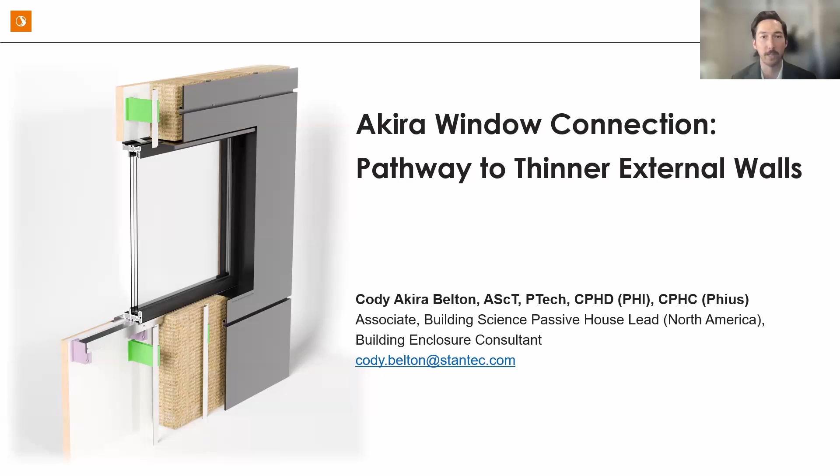I guess the one thing I would add, just for those who have never heard of Akira Window Connection, I am the inventor of this window install method. I didn't do it alone though. Back in 2023, I applied for a grant from the British Columbia government for BC Housing. They used to do these grants that would basically fund up to $30,000 for anything in the realm of building innovation or education. And I had this idea to create essentially a thermal bridge-free window install or door install. Once we received that funding, that really helped kickstart our Stantec team to vet this idea through structural analysis and 3D thermal analysis to give the most accurate linear transmittance results, and analyze it from a condensation risk potential lens to see if it really is what we want it to be. So we'll dive right in.

So what we're going to be going over is what Akira Window Connection is. We're going to review some past water penetration results. I'm going to review a case study; we do similar case studies with a lot of ongoing projects just to try to determine what detailing we want to use on particular projects. And we're going to talk about other projects that have integrated Akira Window Connection. So this ranges from passive house projects that are pursuing the top levels of energy performance, with BC's, so I'm based in British Columbia, Canada, the BC Energy Step Code. There are some buildings that are trying to hit the top levels of that, so we've used Akira Window Connection on those.

And there are also projects that have integrated it in prefabricated wall panels. So there's a huge range of applications for this. And that particular project is the VIU student housing project, so that's Vancouver Island University. We're going to review some mock-up testing and lessons learned, and I have some updated photographs of how that project is progressing.

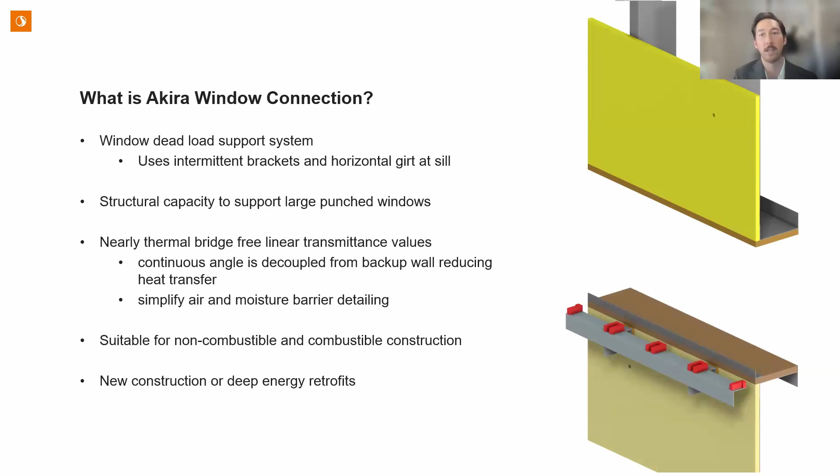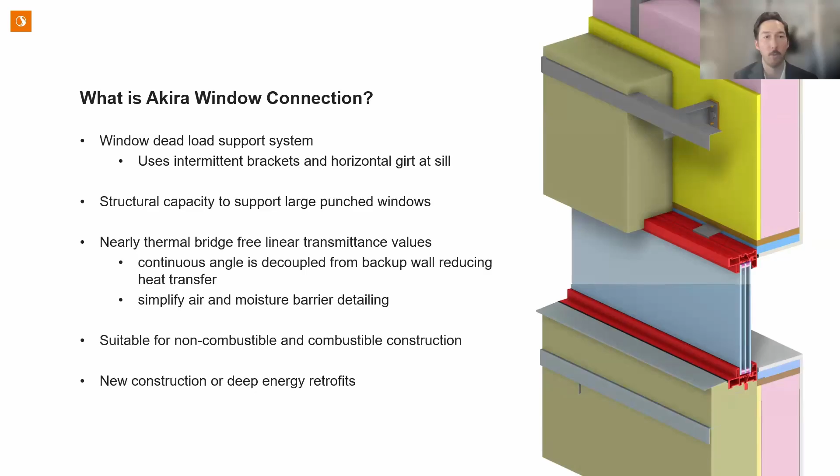So what is Akira Window Connection? Akira Window Connection is a dead load support system with intermittent brackets fastened to the backup wall structure and a horizontal girt supported by those brackets. So the system has sufficient structural capacity to support large windows, enabling architects to exercise design freedom. And the continuous angle is decoupled from the backup wall to reduce heat transfer and simplify air and moisture barrier detailing. So this connection method can provide nearly thermal bridge-free linear transmittance values, or psi values, at the window-to-wall transitions to help improve whole building thermal energy performance at both new developments or deep energy retrofits.

So to review some of the sequencing, there are a lot of different backup wall options that the Akira Window Connection could be applied to. Essentially, it would be a good strategy for any wall that uses exterior or external wall insulation as a primary thermal barrier. So this is just an example of a steel stud backup wall.

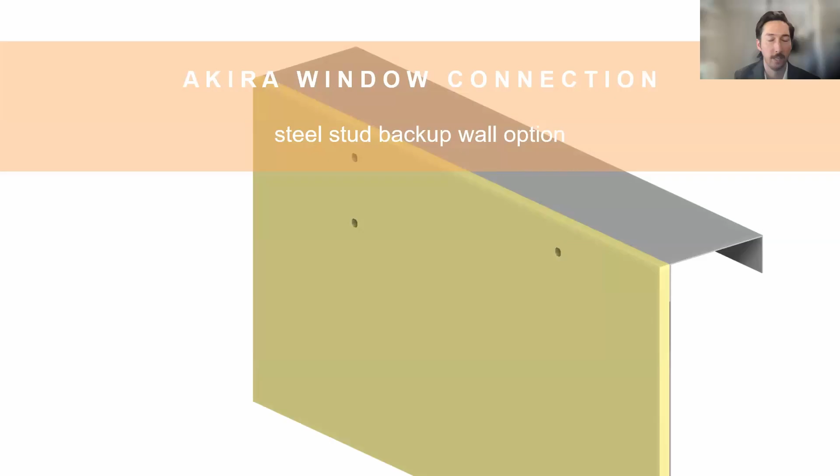So here we have 16 gauge steel studs spaced at 16 inches on center at the windowsill. You'll have your conventional exterior wall sheathing, so it could be DensGlass or something like that. There's an option to line the rough opening with plywood. This is common practice where I come from. It helps with applying different membranes to the sill and whatnot to give you a smoother workable surface rather than dealing with the steel studs.

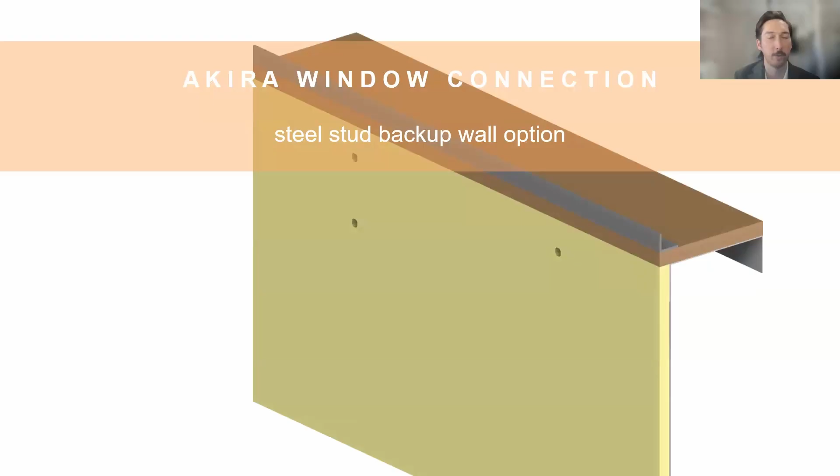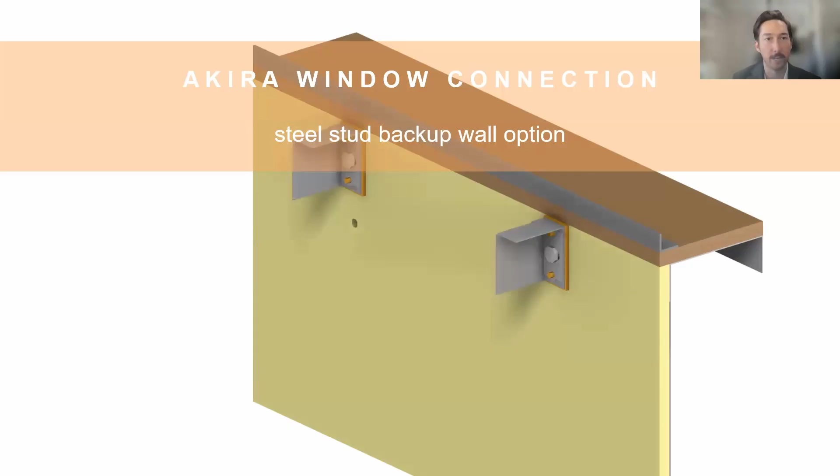And as part of the wind load support system, it's very typical for us to use continuous metal angles at the sill that are fastened into the window frame to help pick up that wind load. And mind you, these are screenshots taken from our 3D thermal modeling software, so this particular sequence doesn't include the wall membranes, but I'll get to that in a later slide. Before you put on these brackets, you're going to wrap your walls with your wall membranes and pre-strip your windows.

But what's going to pick up the weight, the vertical loads or dead loads of your window system, is no longer going to be supported in its typical position on the sill. We are going to use, or repurpose, cladding attachment brackets. In this case, these are approximately 3 inches in depth here. And we're going to line the top edge with a 2-inch by 2-inch, in the case that we analyzed, 18 gauge galvanized steel angle.

So this creates a gap between the exterior wall sheathing and this horizontal angle. That allows your exterior insulation to butt directly into your fenestration with minimal interruption to reduce that thermal bridging. So this horizontal angle becomes the new bearing point. Window manufacturers like to use intermittent shims to help level their window systems, so we're going to do the same here.

So in this particular model, we're showing the Universal Series fiberglass frame window by Cascadia Windows. In a past research study, we repurposed some old thermal modeling detailing, and we already had this window in place. So that's what we chose to use for this study.

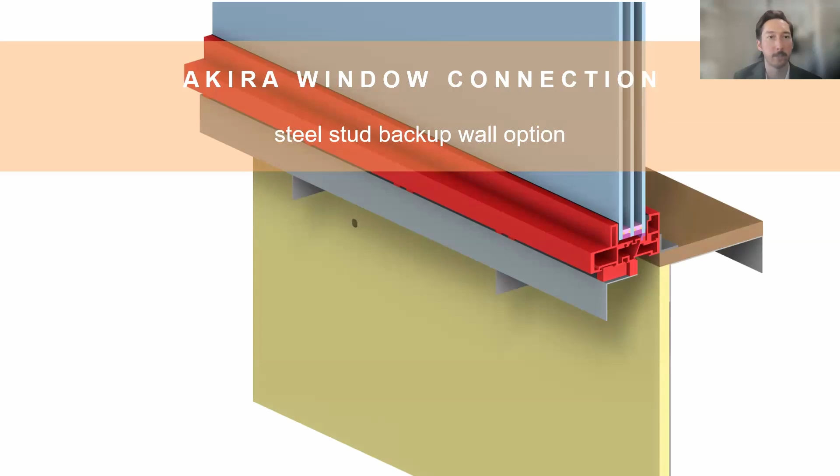And then you're going to have your field of the wall installation for how your cladding is being attached. In this case, they're using larger intermittent brackets with horizontal girts. And you're going to want to fill that space between the intermittent shims with some sort of insulation. I believe good building science practice calls for something that allows for some free draining, so I like to use loose fill mineral wool to fill in those voids. And then you install your exterior insulation layers that are going to butt into your window frame.

And in this particular case, we slightly over-insulated the frame edge. That's absolutely not a mandatory thing with the Akira Window Connection, but the point of this particular detail is we wanted to try to drive down this linear transmittance, or thermal bridge, as low as possible. So we wanted to do everything in our power to make this thermal bridge free.

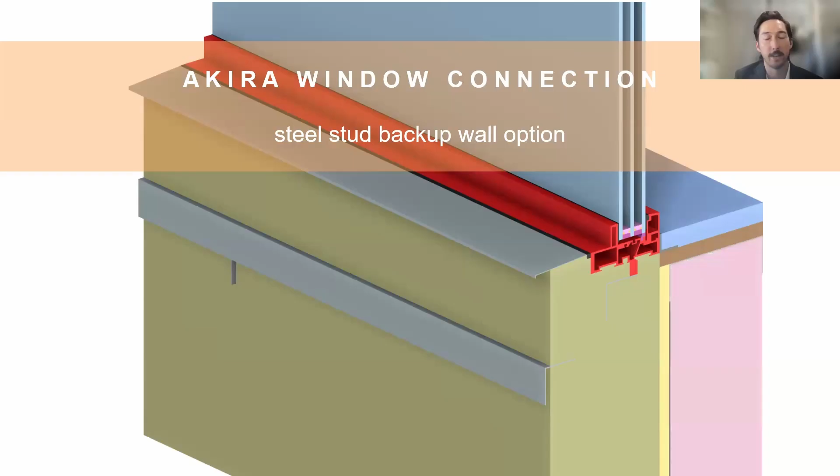And what we found with some trial and error is that if you line the interior rough opening with 1-inch rigid insulation, in this case XPS, we found some reductions in our thermal bridging as well. And then in our steel stud cavities, we have batt insulation, and you apply your interior finishes, and that's it. That is the Akira Window Connection in a nutshell. This is another view of it from the underside, just so you can get an idea of how we're trying to expose the bottom edge of that window frame so we can get our exterior insulation to butt into it.

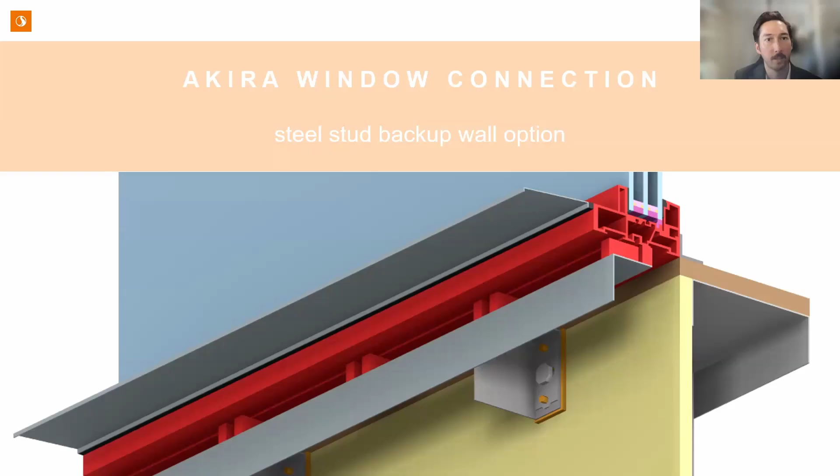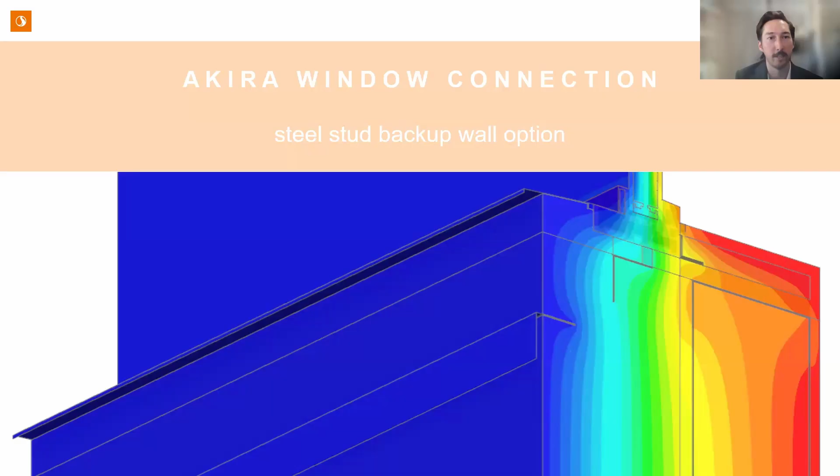So now to look at the water resistant barriers, or the WRB, and the air barrier detailing. This more or less aligns with conventional best practice that's been used for decades from my experience. So you install the WRB sheathing membrane pre-stripping on the exterior wall, and you wrap into the window's rough opening over the plywood liner at the sill, at the head and jambs, and recommend using self-adhered membrane for this application that can self-seal at fastener penetrations, and to use prefabricated corner pieces, membrane gussets, and sealant as necessary to be

air and water tight. So at the sill, if a continuous sill angle is installed as part of the window's wind load support system, as previously mentioned, that's on top of that plywood liner, then the WRB should wrap up and over that sill angle to form a waterproof back dam. So if you refer to location A on the left here, I'm going to try to zoom in.

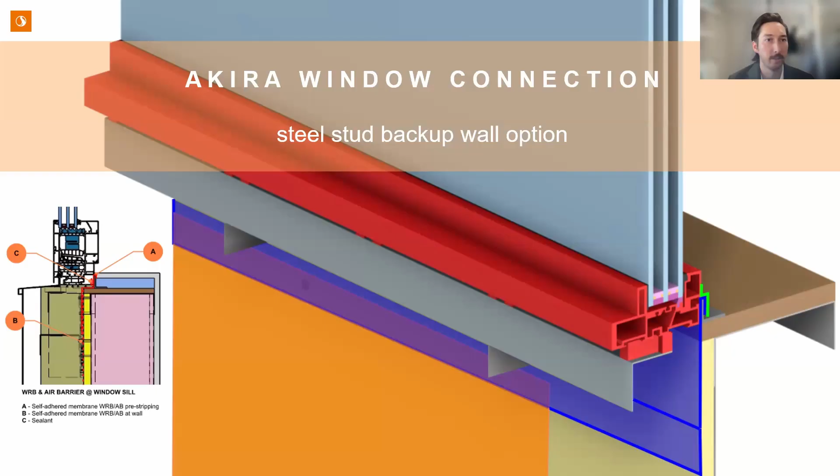So in this detail, we provided an air and water seal installed between the interior edge of the window frame and the sub-sill flashing membrane. So this could be with an air barrier tape or sealant.

So the other beauty of this particular install that I like from a building science perspective is that window systems, if we aren't proactively renewing them after the end of their service life, they will eventually leak. This typically might happen at the mitered corners where different windows are manufactured in different ways, but a lot of the times they will rely on some sort of internal sealants. And at these mitered corners where they're relying on sealants, those eventually will fail and you'll get water percolating through your window frame. So I like the idea of positioning the window completely outboard of our WRB, where the water can basically freely drain through our exterior insulation layers, if it is something that's more or less breathable, like semi-rigid mineral wool.

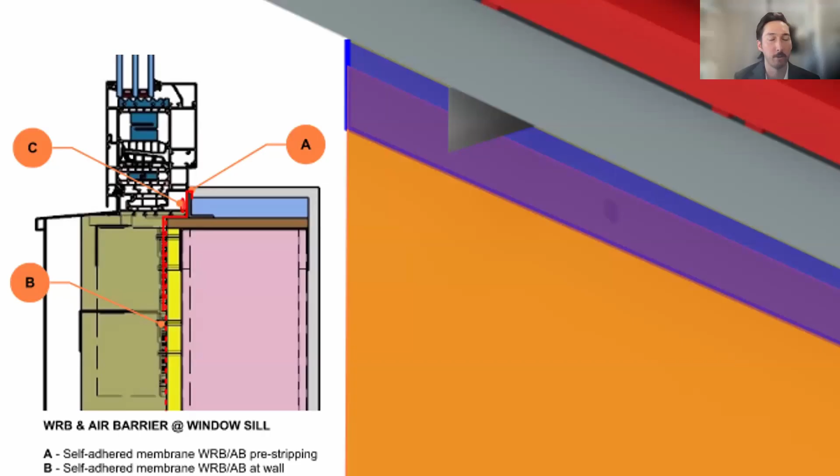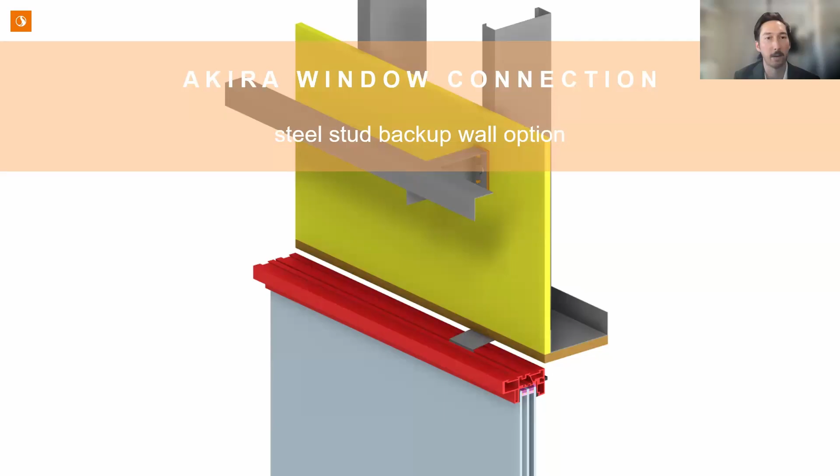So to get into the window head install sequencing, we again have the steel stud backup wall, our exterior wall sheathing, we're lining it with plywood, and our clear field wall assembly, whatever that may be. And the only difference here is that at the head, we don't need to worry about the vertical loads of the fenestration. So all you're seeing here is the intermittent strap anchors that the window manufacturer will use. And this window positioning will work for pretty much all window manufacturers, where the strap anchor should still be able to reach the backup wall to fasten into that.

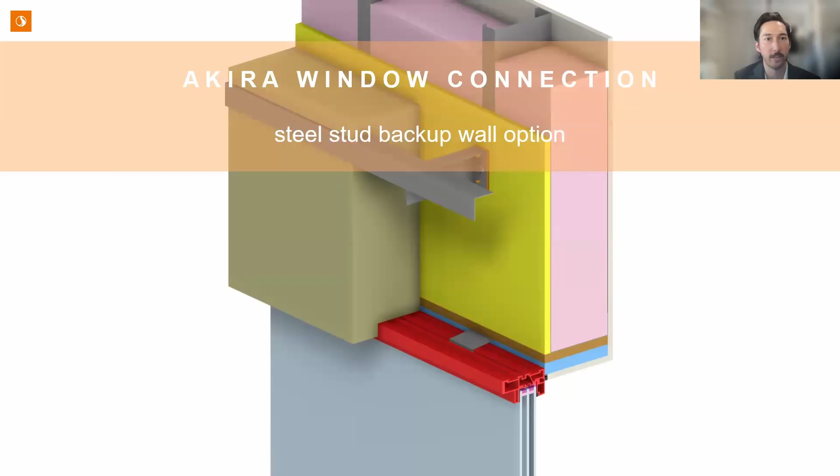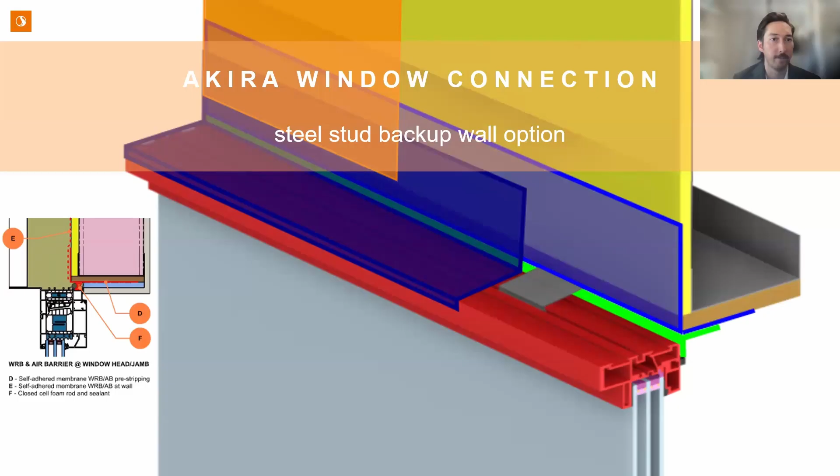So at the head and jambs, if additional moisture durability is desired, you can install a self-adhered membrane or a high-performance tape on the sheathing membrane pre-stripping at the wall face and seal to the window frame. And if you look at location F on the left here, this provides an air and water seal installed between the WRB sheathing membrane pre-stripping and the window frame from the interior side. So again, this could be an air barrier tape or rod and caulk seal.

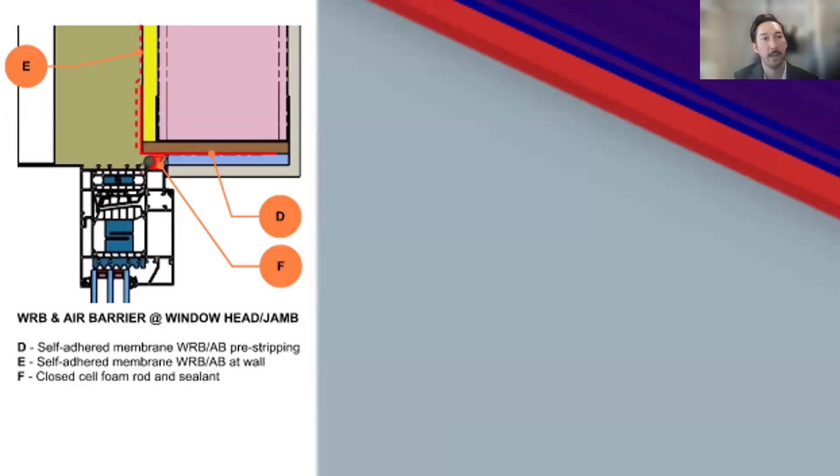And in a later slide, we'll get into some laboratory testing done at Cascadia Windows, where basically we would test this at absolute worst case scenario that wouldn't really happen in a real situation, but to really test the durability of these types of rod and caulk seals at the perimeter, we tested the window with having the entire WRB exposed. So there was no exterior insulation, there was no cladding. We just had the WRB installed on the wall, the window installed, sealed with rod and caulk, and tested it mimicking a high wind-driven rain event and had successful results with no leakage.

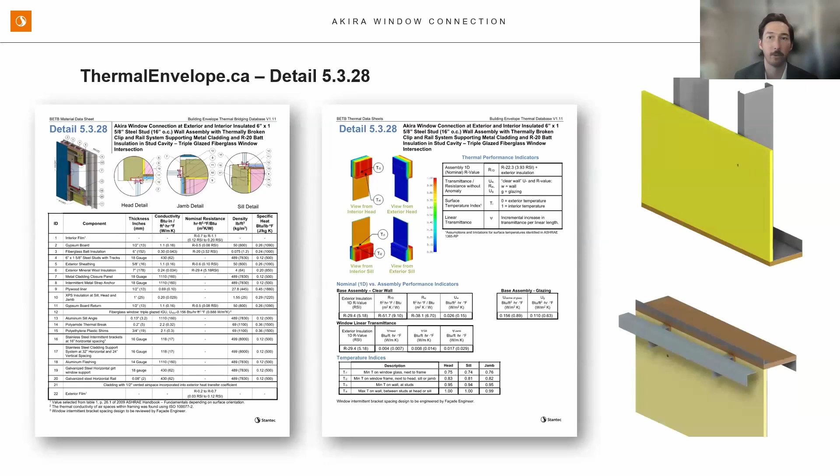So here are some sample data results sheets available at thermalenvelope.ca for Akira Window Connection for the steel stud backup wall option. If you've never heard of thermalenvelope.ca, I highly recommend you go check it out after this presentation. It is, I believe, North America's greatest resource for learning about the U-values of opaque wall assemblies and roof assemblies, all floor assemblies, and the psi values modeled in 3D at various junction details. So it's, I believe, over 700 plus details and growing. And these were added a ways back. And as more manufacturers adopt Akira Window Connection, we will be adding more and more options, analyzing different products and their respective psi values or linear transmittance values.

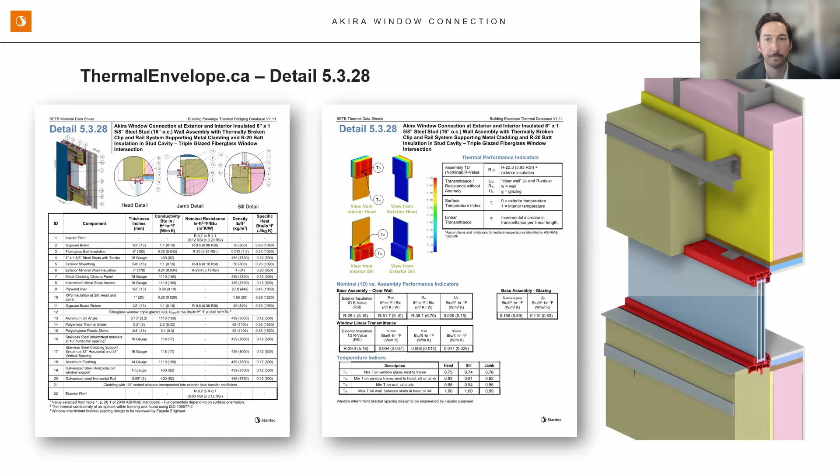So the use of intermittent brackets triggers the need to use 3D thermal simulations to get accurate psi value results and accurate interior surface temperatures. Attempting to use 2D thermal modeling methods such as Therm or Flixo, although they all have their place for certain situations, as soon as you're dealing with more lateral heat flows created by highly conductive components like metal thermal brackets, and especially steel studs, the 2D models can't accurately capture the heat loss happening laterally, because we can only slice through one plane of that particular junction.

So this is where relying on 3D thermal simulations is a big help to get more accurate information into your thermal model. Potentially, if you're relying on 2D results, your results could be skewed plus or minus 60%, we found in the past. So if it's a high impact thermal bridge, it's really important to get very accurate results.

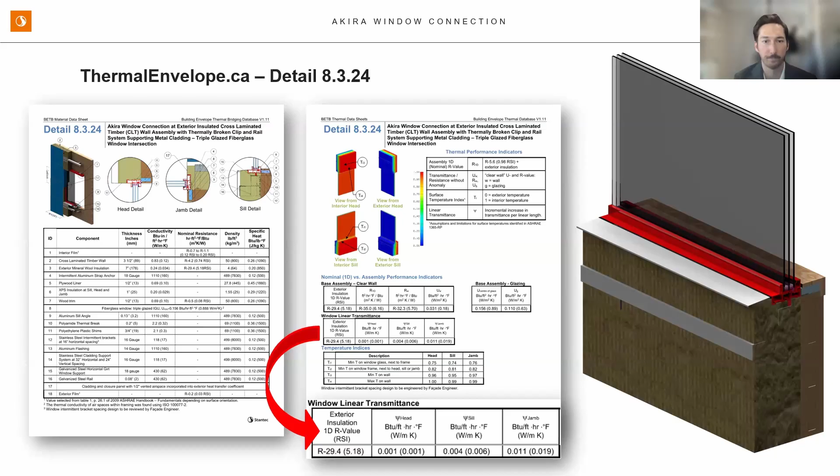So this just goes to show that Akira Window Connection is increasing the design freedom for architects that may want to have larger windows. The risk of using a window install method that hasn't been vetted by structural analysis is that the architect may want large windows on a particular project, but your energy modeling assumed a system, and there are many different methods out there. The ones that come to mind right now are the type of systems that use rigid foam in some cases fastened to your backup wall to help support the windows.

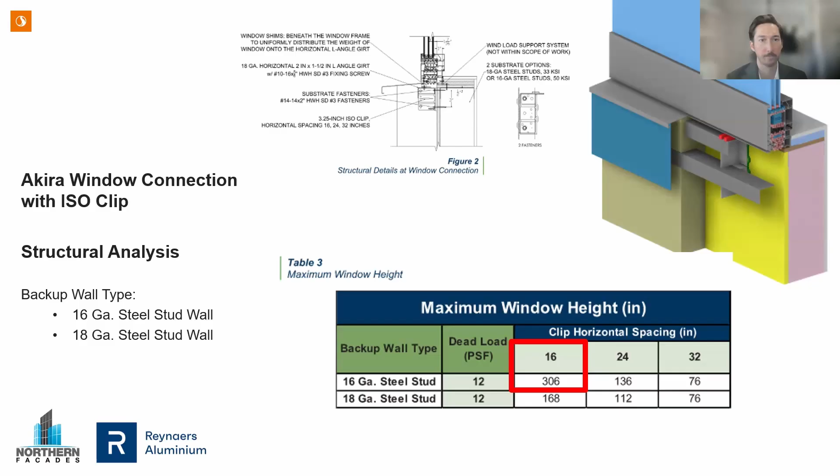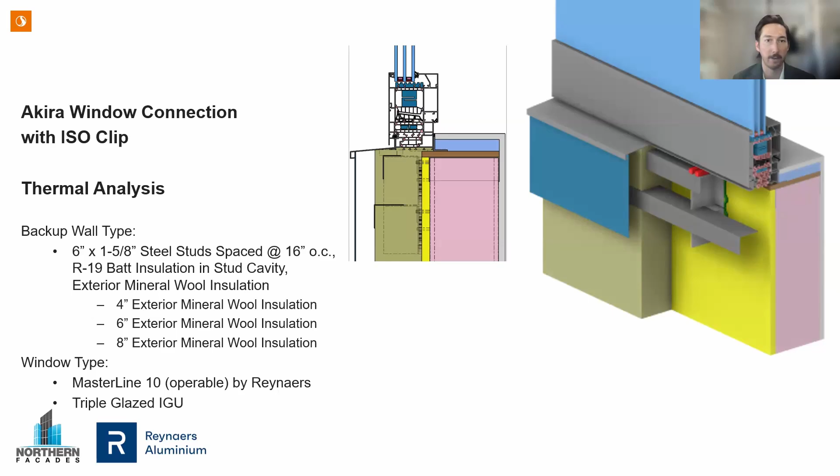So the building performance analysis team at Stantec conducted a thermal analysis of Akira Window Connection with a 3¼ inch IsoClip as the window dead load support system. The thermal analysis was for a steel stud backup wall that included R19 batt insulation in the steel stud cavities, and they tested various exterior mineral wool insulation thicknesses listed here at 4 inches, 6 inches, and 8 inches.

I know these results here are very small, but you will receive a copy of this presentation so you can check them out later, or request them from Northern Facades or Reynaers, which were the components analyzed in this system. They provide the results for all the different insulation levels for the different transitions at the head, sill, and jamb.

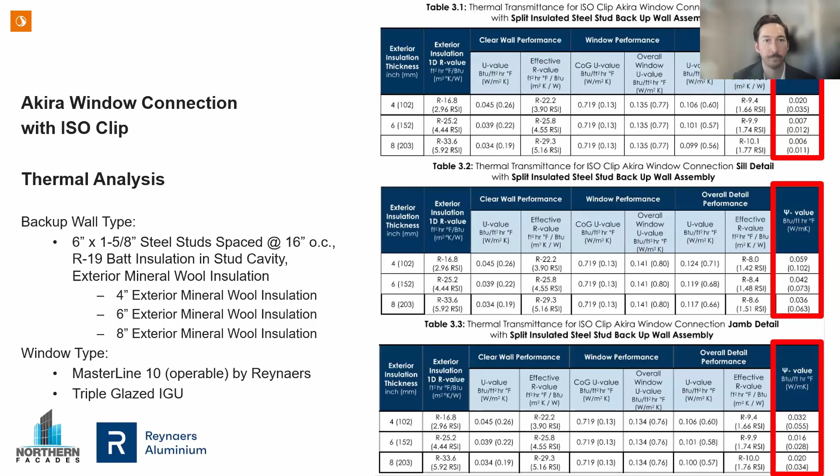So the facade team also conducted a detailed thermal analysis for another thermal bracket, ISO Clips, as the window dead load support system in this case. Here I got some sequencing using this particular product. With every cladding bracket, thermal bracket you may want to use for your particular project, they all have different pros and cons and features.

One unique thing about this particular product is that I visited their manufacturing plant in Langley, and these brackets can actually be cut to customize sizes, so the actual height of these things can be adjusted to potentially support even larger windows. So that was a unique factor of this.

And to suit the manufacturer's wants for this particular install, instead of having the interior face of the window frame exactly aligned with the exterior face of the exterior wall sheathing, they wanted it to be slightly inset so they can still utilize their strap anchors that are typically installed at the head and jambs for wind load resistance.

So it's the exact same concept. We're lining it with our horizontal girt, got their window there. And yeah, you've seen all that before.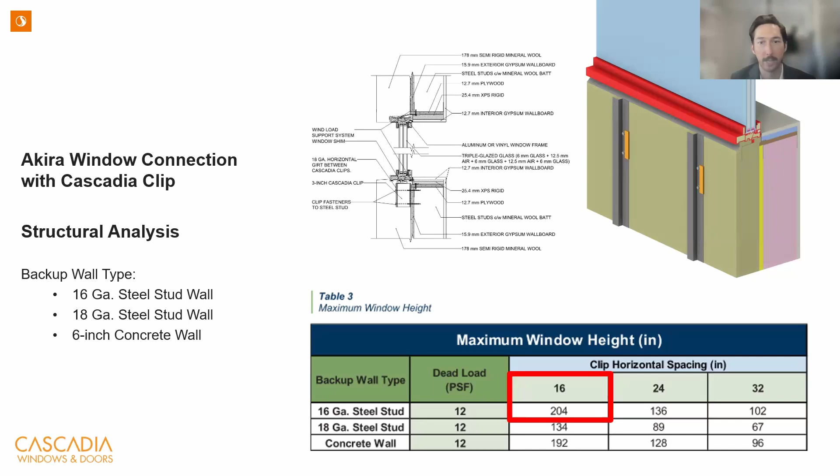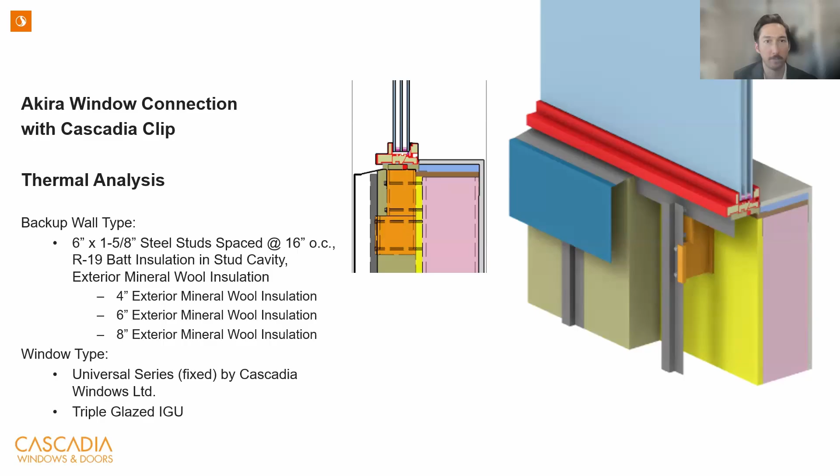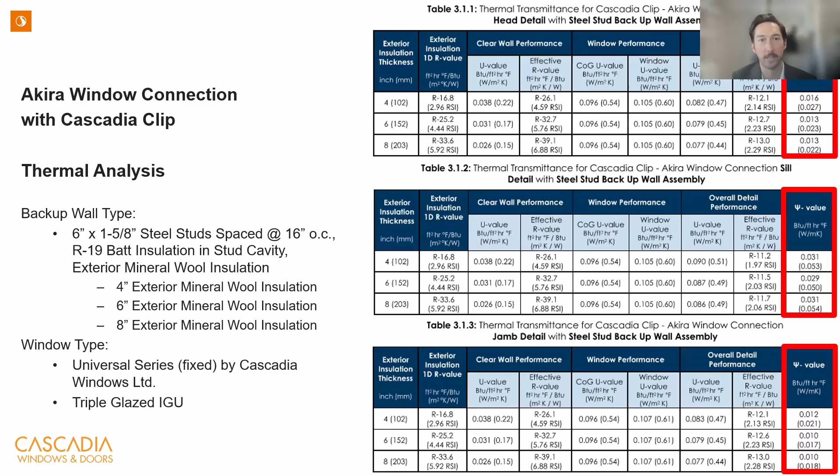So the building performance analysis team at Stantec also conducted a thermal and condensation analysis of Akira Window Connection with the 3-inch Cascadia clips as the window dead load support system. For this analysis, it was again for the steel stud backup wall that included R19 batt insulation and the same insulation varieties previously presented with the ISO clip option. So this is for the 4-inch, 6-inch, and 8-inch exterior insulation options. And again, here's some very small results for you to review at a later date, I hope. But this gives you some accurate data inputs you could be using in your energy models for window installs at the head, jamb, and sill.

So the condensation risk analysis focused on the window to wall connection detail and evaluates surface temperature at the glazing, window frame, and window support components. This analysis is based on conservative estimates for steady state conditions to determine if condensation would accumulate when interior air contacts components within the connection detail. The Akira Window Connection thermal simulation calculated no risk of condensation at all component surfaces inboard of the exterior gypsum wallboard that are warmer than the interior air dew point temperature, with the interior air temperature at 68 degrees Fahrenheit with 60% relative humidity.

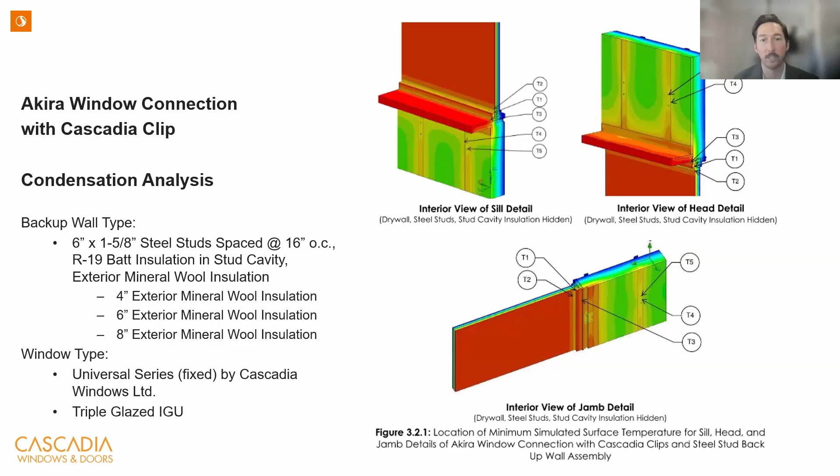Now, Cascadia constructed a laboratory mock-up with a Universal Series fixed window supported by Akira Window Connection with their 3-inch Cascadia clips. The air and water seal at the sill was achieved with sealant, so there's a sealant bead at the interior edge of the window frame and the sub-sill flashing membrane on the sill angle. At the head and jambs, rod and caulk was installed in between the WRB sheathing membrane and pre-striping at the window frame from the interior side to maintain air barrier continuity and provide watertight joints.

So this is nothing new. This is very conventional practice that I've been basically seeing and doing on the majority of our projects going back to 2006. So I'm sure it goes much further back than that. And this is a very tried, tested, and true method of creating good air tightness, continuity, and water tightness between your wall and your window system.

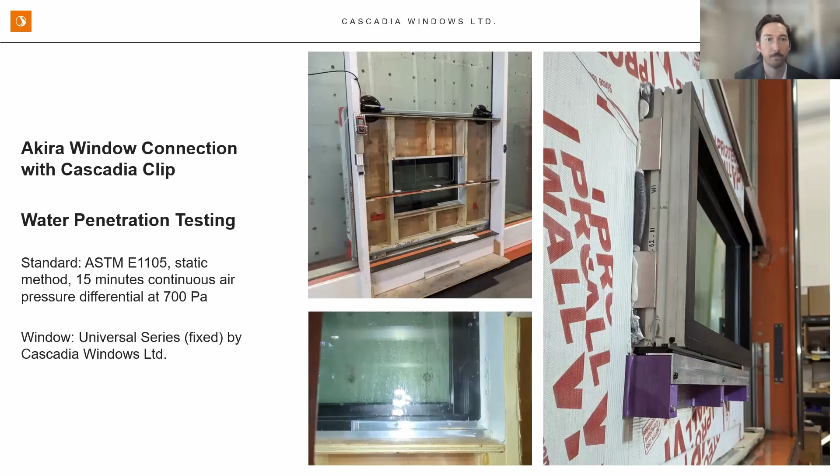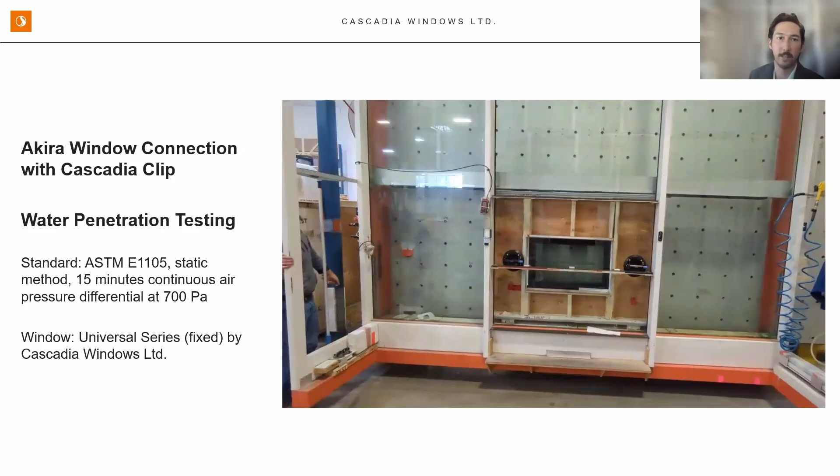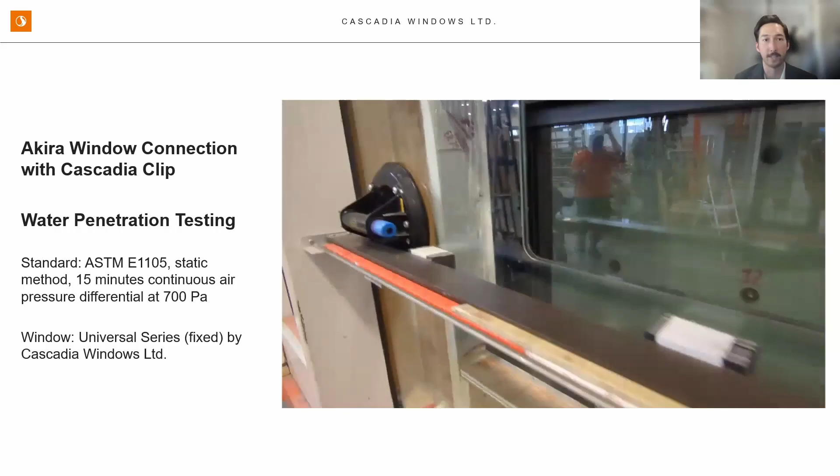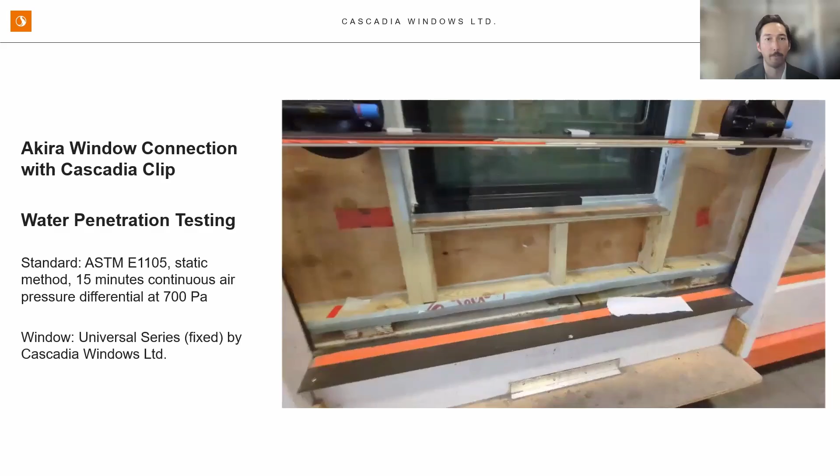So here's a little video of the testing chamber installed at the Cascadia Windows factory in Langley, British Columbia. They do a lot of this testing when they're manufacturing their windows, and they want to make sure that they have a high level of quality control. I'm not sure at what frequency they do this, but this was a handy little chamber to conduct this test for this unique, innovative window install.

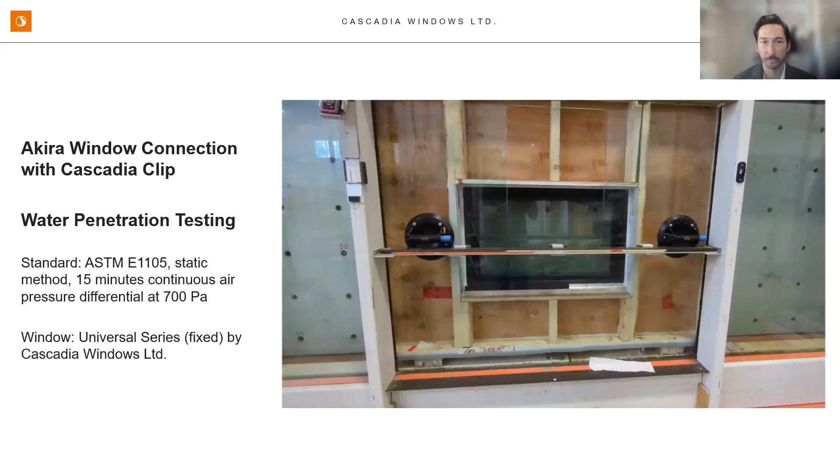So now we have Akira Window Connection dead load structural results. We have linear transmittance results for various backup wall types. And now we really need to put this to the test on a real project. So we started by conducting a thermal performance study for the Twin Towers retrofit project using Akira Window Connection at all punch windows to showcase its beneficial impact to the external wall design.

So a little background information on this project. The Twin Towers are two concrete, mixed-use, high-rise towers located in North Vancouver, British Columbia. They were constructed in 1977. Tower A is 16 stories, Tower B is 13 stories, and the retrofit is targeting Step 3 in the BC Energy Step Code, which has a space heating demand target of 25 kilowatt hours per meter squared per year.

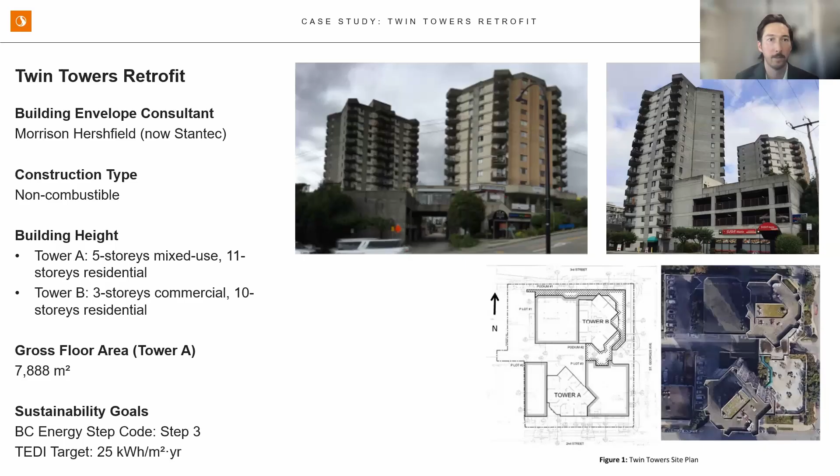So to achieve Step 3, based on the project's dynamic energy model, we need an opaque wall system that meets or exceeds effective R 9.1. So how do we get there? What wall assembly and window install design will achieve this thermal resistance target?

So we analyzed 3 different window install design options, and all 3 are available to view at thermalenvelope.ca. We have the conventional option on the left, the improved option in the middle, and Akira Window Connection shown on the right.

So the objective was to determine the clear field wall design based on the 3 window installs shown here, and how a better window install design can provide a trade-off opportunity with the external walls to reduce the exterior insulation thickness. So all 3 options will produce equivalent energy performance and provide an impact to the wall construction material costs.

So first we analyzed a poor window install, the conventional option, where the window's sitting directly in the rough opening on the steel studs. So this option leads us to add excessive insulation to the external walls to compensate for the heat loss borne from this window to wall transition. This can be explored in the energy model, but typically reveals diminishing returns to the overall thermal performance.

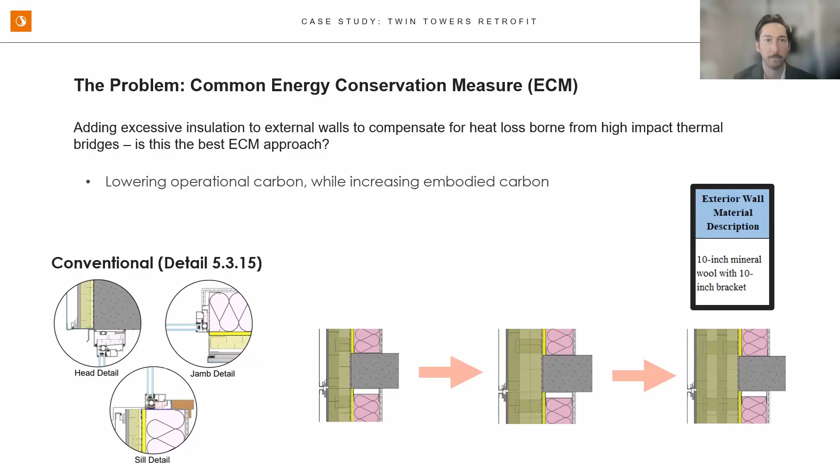So a more effective energy conservation approach is to reduce heat loss at high impact thermal bridges that can be optimized. So by changing the window install to Akira Window Connection, we can reduce the exterior walls insulation to 6 inches thick in lieu of 10 inches and still achieve effective R 9.1 at external walls.

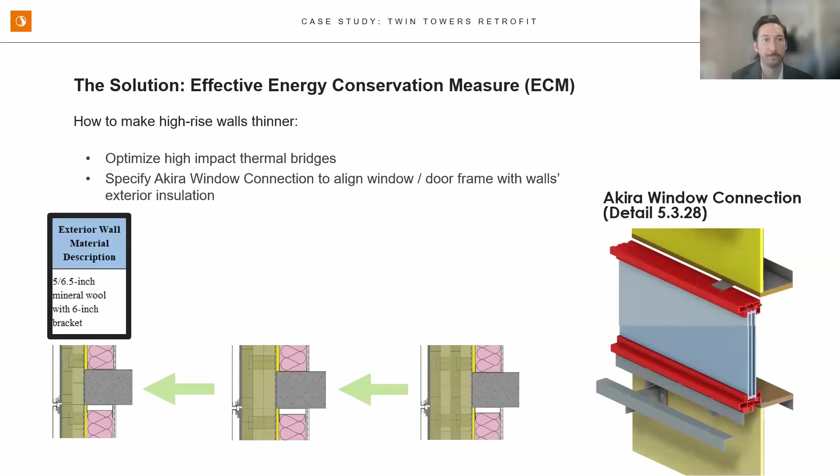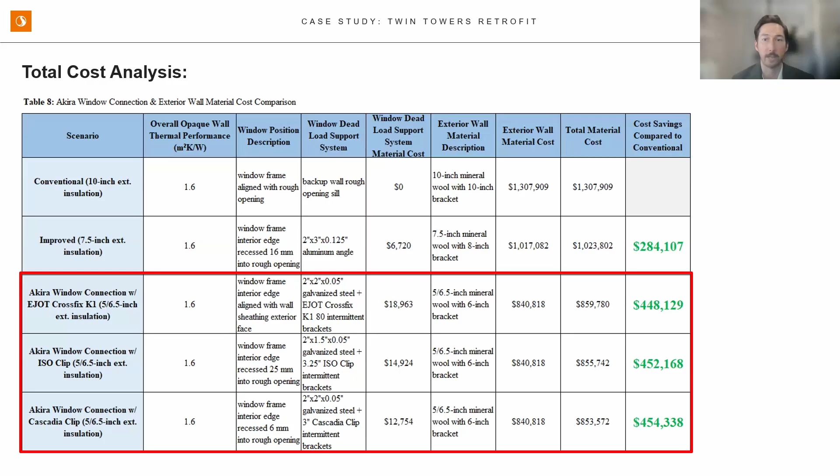So table 8 shows the material cost comparison for Akira Window Connection plus exterior wall impacts for the Twin Towers retrofit. So in essence, with this reduction in insulation from the exterior insulation and the reduction in cladding attachment brackets, we would anticipate to save up to $454,000 Canadian, or about $331,000 US in material costs compared to a scenario with a conventional window installation.

Now getting into some projects that we've used or are using Akira Window Connection in. So we have the PNE Amphitheatre project in Vancouver. So the back of house, behind the stage where we have dressing rooms, there's a commercial kitchen downstairs. So this building originally was targeting passive house, but because of adding the commercial kitchen in the basement and the relatively small size of this back of house, achieving passive house wasn't feasible. So we ended up targeting the CaGBC zero carbon building design standard instead.

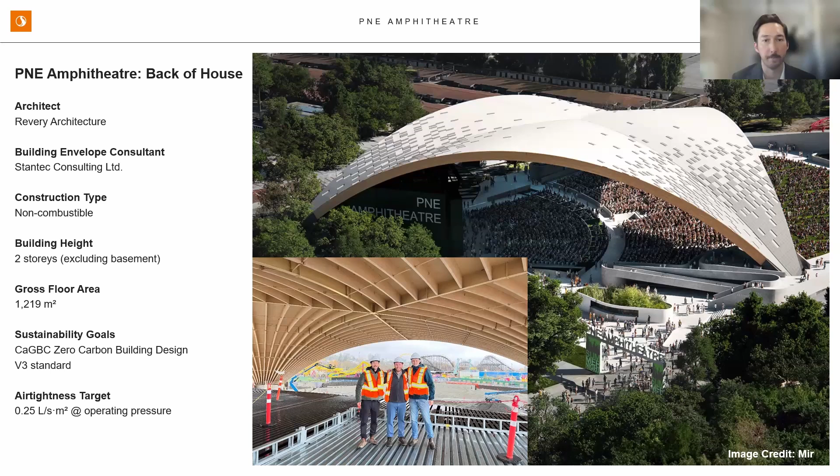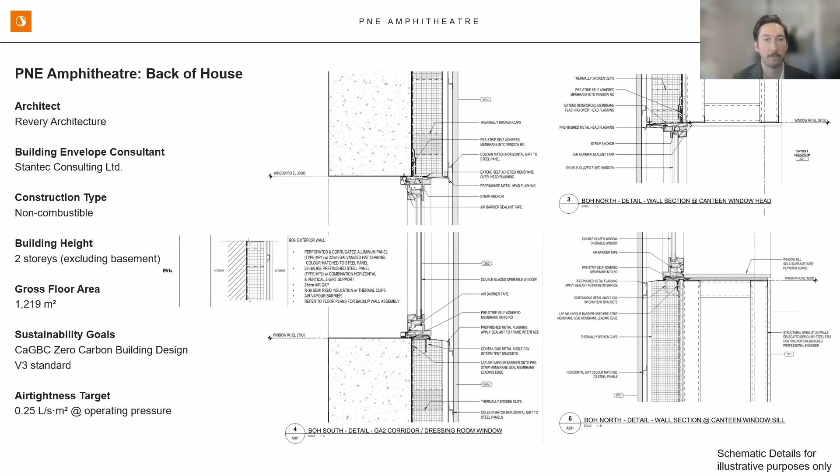So detail 4 on the left side shows Akira Window Connection at a concrete wall, and detail 3 and 6 on the right side shows Akira Window Connection at a steel stud backup wall. And the tallest window on this project is 15 feet tall. So based on our previous detailed structural analysis using 3-inch Cascadia clip, this window falls within the structural capacity of Akira Window Connection.

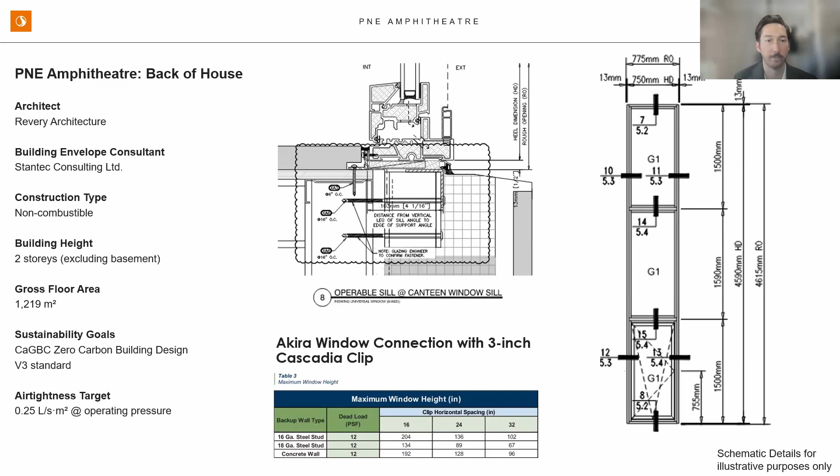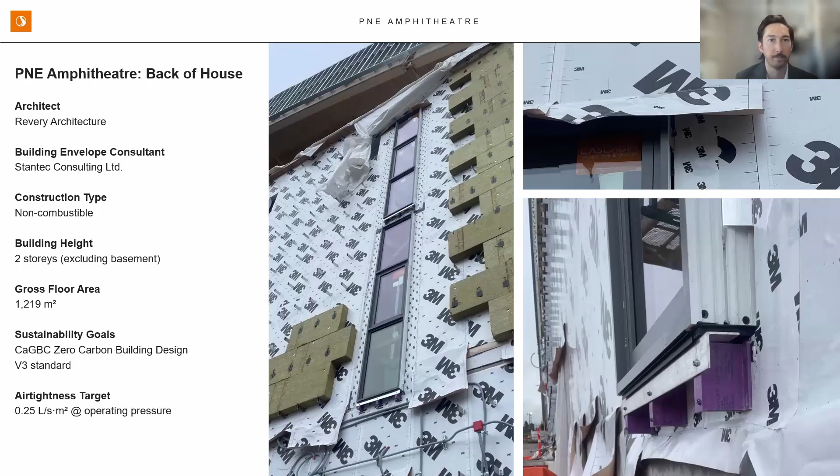And here are some recent photos of the project with Akira Window Connection complete at this one location. And here's an interior view, just to show some of the conventional air and moisture barrier detailing at the jamb and sill using rod and caulk.

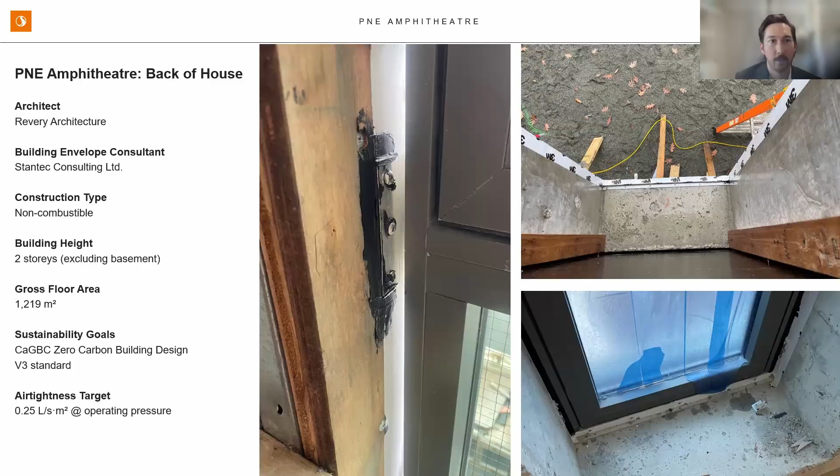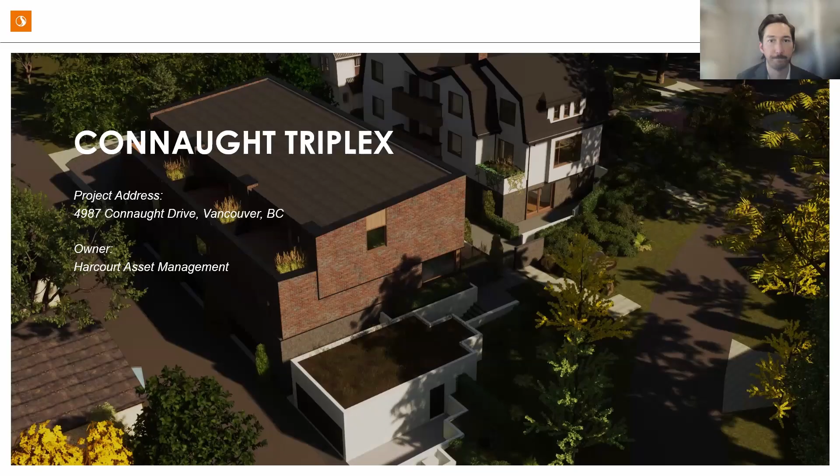Now here we have the Connaught Triplex and Character House. So this project is pursuing Passive House Classic certification for the Triplex and the EnerPHit Classic certification for the Character House on the same site. So although technically challenging due to the small scale, the design team and ownership collaborated extensively on this project, and it's been pretty rewarding up until this point. They just broke ground a couple weeks ago, and we are on track for our final design that is on track for Passive House Classic certification for this triplex building.

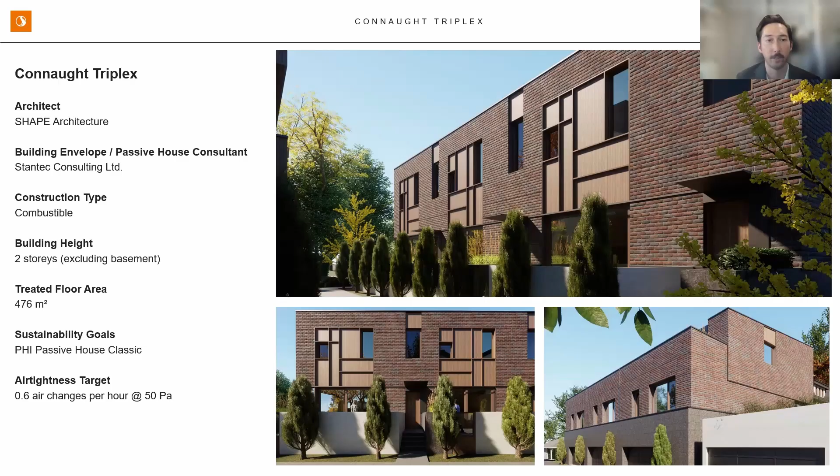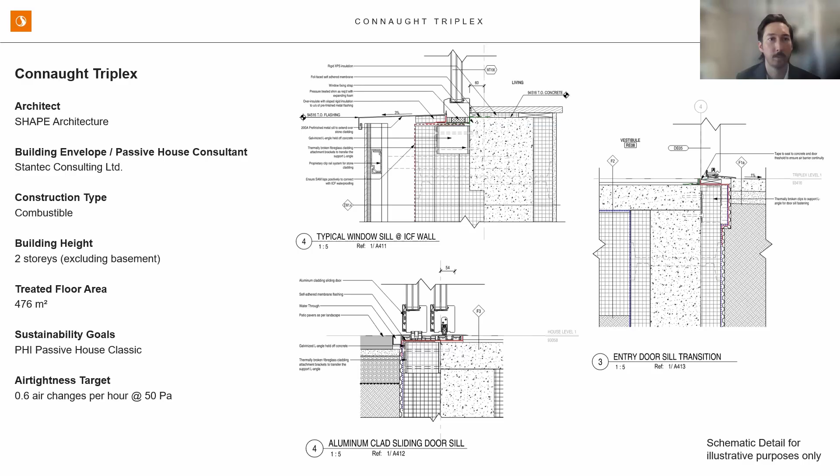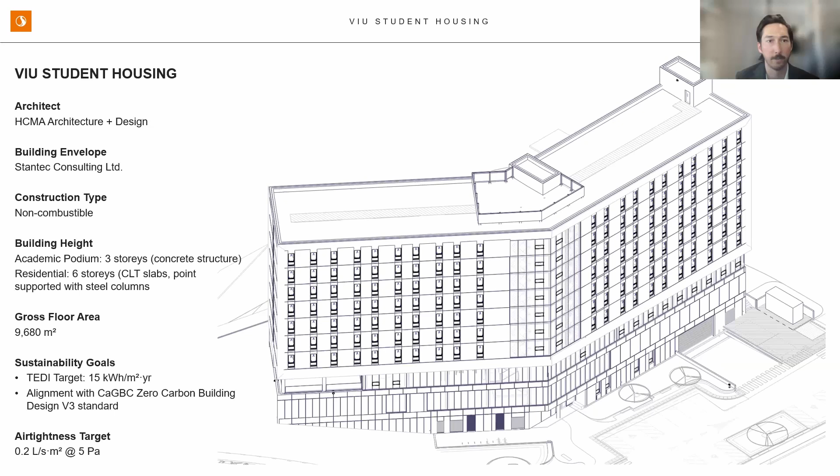On to the VIU student housing project, Vancouver Island University. So this project is targeting a 15 kilowatt hour per meter squared per year TEDI or space heating demand. So that's getting very close to Passive House Classic energy performance levels. So this project will use a prefabricated wall panel by Centura Building Systems.

So standard window detailing used in the early design iterations resulted in effective R24.5 walls, but based on the project's dynamic energy model, this wasn't good enough to meet step 4 TEDI for this project. So changing the window install to use Akira Window Connection raised the wall's effective R value to R29.2, and that was necessary to achieve the TEDI target without adding additional exterior mineral wool insulation to the walls that was already 8 inches thick.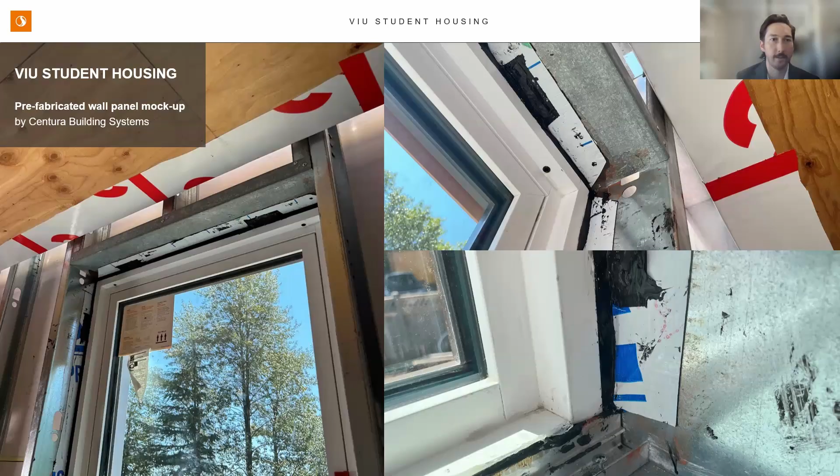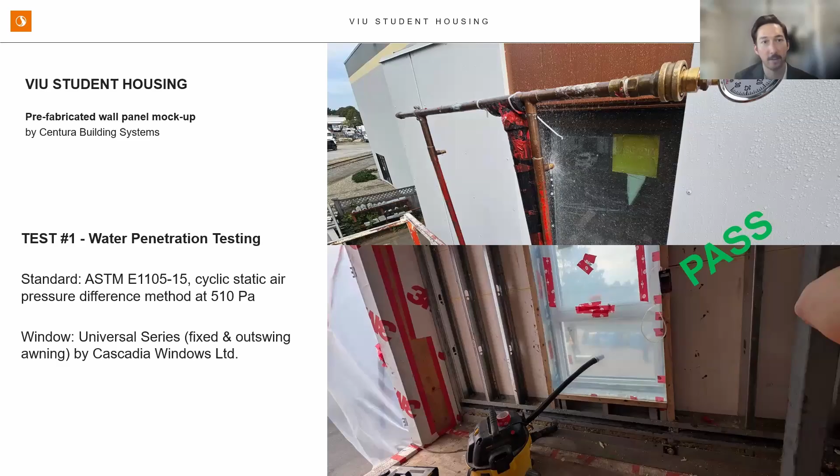And you may have noticed that there's a big black smudge going over the strap anchors. Initially in this mock-up, the installers smeared sealant from the rod and caulk over these anchors, attempting to seal them up, but this is not the recommended approach. And this may have passed the water penetration testing, likely because we have lots of redundancy and protection with the exterior cladding and exterior insulation. But when we tested it with qualitative air leakage testing, it definitely picked up these air leaks.

And so the next step was for Centura Building Systems to repair these sealant joints to have the mock-up tested again for air leakage. So the lesson learned here was proper sealant application. One, you need to execute proper surface preparation. And for these particular strap anchors, these windows are from Cascadia Windows, and Cascadia Windows does have a nice sealant bead tutorial video on their website.

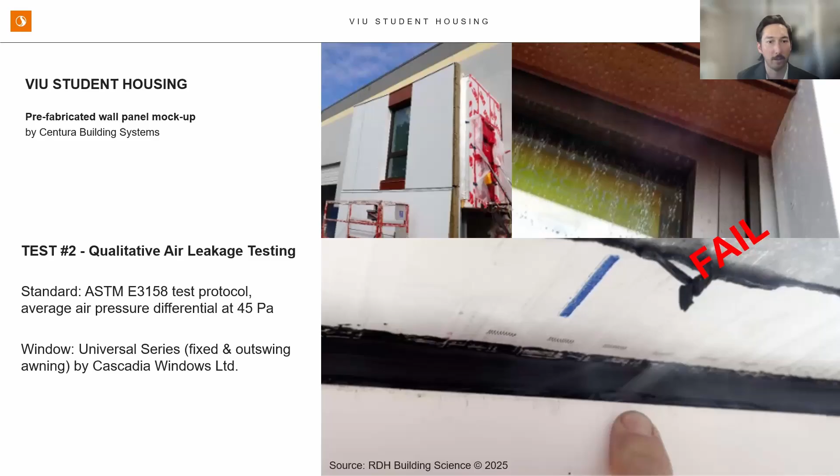So here are a couple screen grabs from that tutorial. It's essentially an easy protocol to make sure that you have sealant at the interface between your intermittent strap anchors and your air barrier and water barrier membranes. And another little tip and trick is to install black backer rod with a contrasting sealant color, because this really helps with a visual quality control check. You notice in the previous slides they use black rod and caulk, so visually it'd be very hard to see if at the midpoint the sealant's very thin, because you wouldn't even notice that you could actually see the backer rod. So if you were to use a clear or white sealant, you would have better quality control.

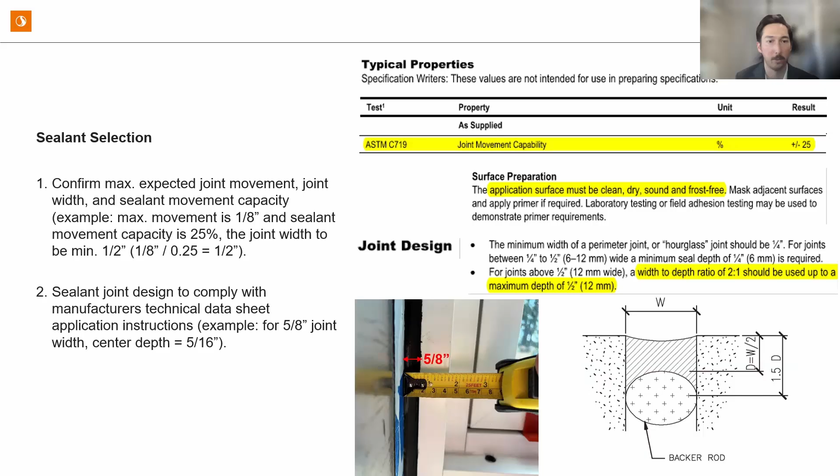So this is probably getting a little in the weeds, but definitely with different sealants, there are different protocols in terms of your maximum joint width, how much it can move, and setting your mid-span depth for that sealant. So that all comes in with proper workmanship and tooling of your joints. Here are some recent photos of this project with the prefabricated wall panels being installed.

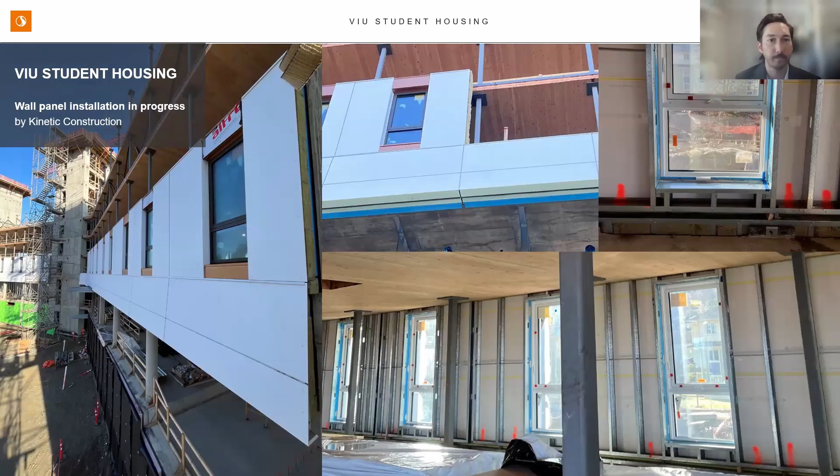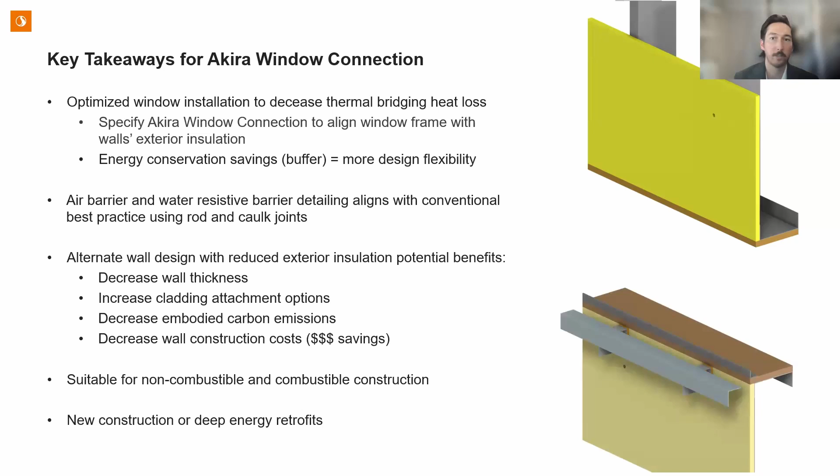And finally, key takeaways for Akira Window Connection. It's optimized to decrease your window thermal bridging heat loss. Akira Window Connection allows you to align your window frame and walls exterior insulation. The water-resistant barrier and air barrier detailing aligns with conventional best practices using rod and caulk joints. Energy conservation savings could be used to create an alternate wall design with reduced exterior insulation. This could lead to decrease in wall thickness, increased cladding attachment options with smaller brackets, decrease in embodied carbon emissions.

So this means less insulation, less raw material extracted, processed, manufactured, transported, installed, and disposed of at the end of the building service life, and decrease wall construction costs due to the reduced exterior wall insulation and reduced cladding bracket sizes. So this install is suitable for non-combustible construction and combustible construction for both new developments or deep energy retrofits.

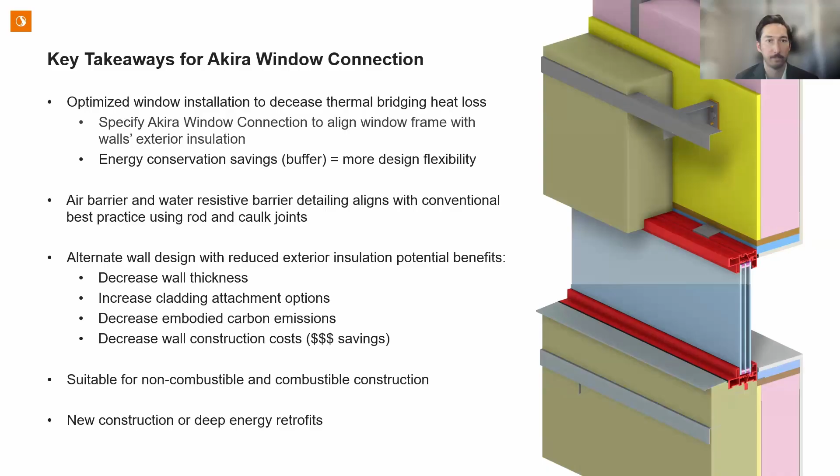And that's it. Hopefully we got some time for some questions before the Phius announcements.

Yeah, thanks, Cody. I see a couple of questions in the chat. I think they were pretty early in the presentation, so generally have been covered, but the two questions are, how is the window frame drained? No, you went into that a bit. And how is the window fastened? Brackets, direct window screws, flange. Again, you went into that a bit, but anything that you think would be helpful to add?

So likely you wouldn't use your typical nail-on flange windows for this particular install, because we're positioning the windows completely outboard of your backup wall structure. You're not going to have anything to nail to, and that's kind of the point.

And I'm sure some people have been involved with projects where they create a window buck. They'll line the outside of their sheathing around their windows and doors with 2x material, or something else, maybe a Compacfoam. But for this to really reduce the heat loss, we want to maximize our exterior wall insulation completely butting into the perimeter edges of our fenestration to reduce that heat loss.

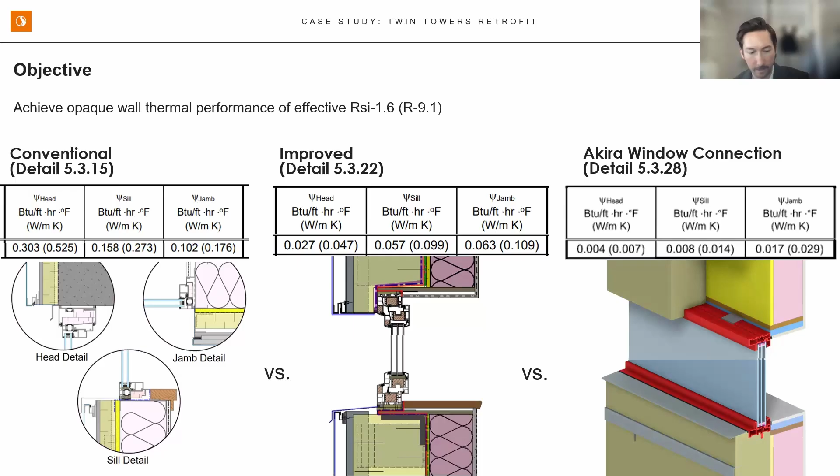So it's accepted right now to use default values according to Phius, but I believe in time there's going to be more finite rules with that in terms of the size of the project that it's applicable to. Yeah, yeah, we are here in Germany.

We have the approach to do PHI and Phius. So we are based in Germany and use PHI and Phius, and the mixture, I would say, is the goal. And we're doing multifamily passive house buildings in the US, and yeah, it's a good presentation. It's really interesting, thank you.